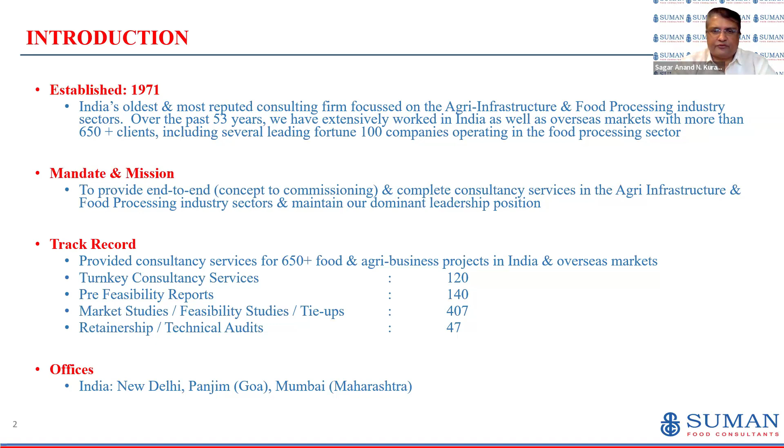To take the topic forward today, when it comes to designing and looking at a food processing plant, there are two major factors that come into play. One is the external factors. These are primarily those in which, while planning a plant and project, we do not have much control over, and therefore those are the factors we have to account for when undertaking planning and designing of the food processing plant.

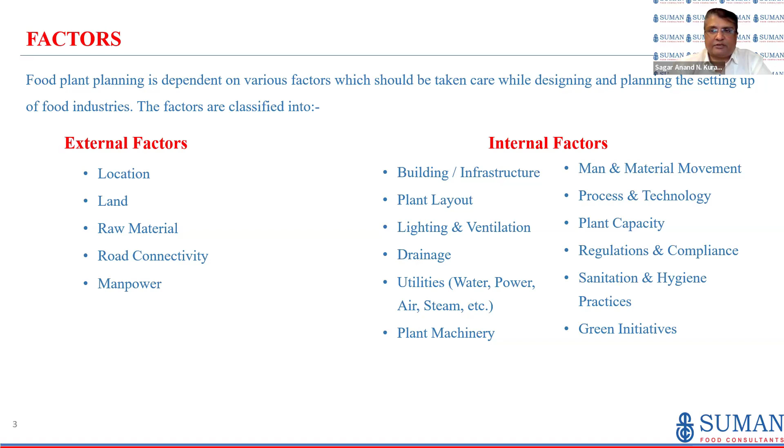The internal factors are ones on which we have control, but have to look into in detail in order to ensure that the factory is planned, installed, and commissioned in accordance with those expectations. My topic today is going to talk on each and every one of those factors, so there is a deep understanding of what needs to be looked at when putting a food processing plant in place for our clients.

So let's talk from an external factor point of view. When it comes to external factors, location plays a key aspect in planning of a food processing plant. Now why location? Primarily because of the availability of raw material.

If you have to understand, in terms of food industry, we are a big country where there's a lot of diversity in terms of the horticulture profile. Typically, food industry is put in an area where there is good availability of key raw materials within about 100 to 150 kilometer range of the food processing plant. So that becomes a key factor in terms of planning a plant. The location, as I said, has an impact with regard to raw material availability.

Another factor of location we have to look at is from a point of view of climatic conditions. If you are in a heavy rain zone area, the plant has to be designed differently. If you are in a very dry area, or a hot or humid condition, there are different aspects of plants that have to be looked at.

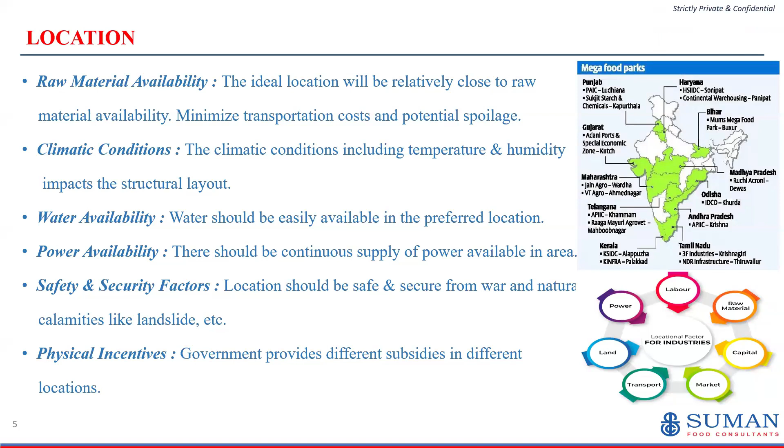As far as power is concerned, power is another factor. You have to keep in mind that power is a state regulated issue. So the cost of power in one state is going to be different from the cost of power in another state. And therefore, entrepreneurs make a call on the location of a plant based upon power availability also from this point of view.

I'll give you an example. Uttarakhand is one of the states which has a very low unit cost of power as compared to, say, Madhya Pradesh or Maharashtra. So if I'm looking to set up a very power-heavy kind of plant, and my raw material availability is there in that particular region, and it is there also in Maharashtra, I may look to set it up in Uttarakhand versus Maharashtra because of the power factor associated with it, because in terms of running, it will be much cheaper.

Obviously, we do projects in India and abroad, and hence the safety and security aspect of a project also comes into play. I'll give you an example. Angola, where we have set up plants, or some African countries—let's take Angola as an example—was under a civil war till 2003. In 2003, Angola opened up, and as the country opened up, a lot of security and safety concerns got removed. And therefore, you had a lot of plants and projects that came up in that particular country.

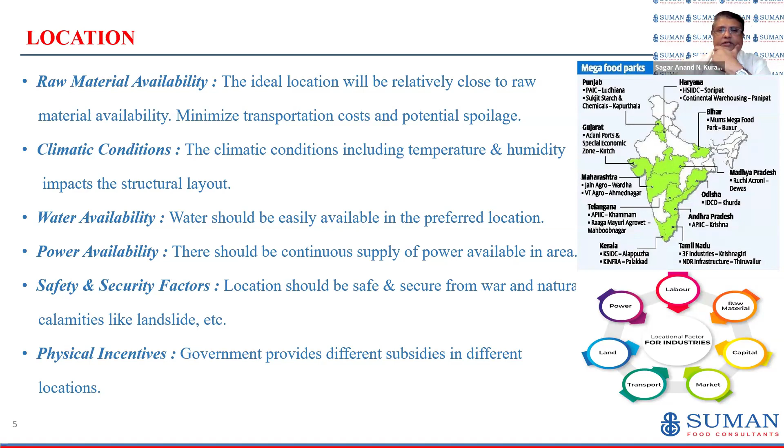Both state governments and the central government give incentives in terms of capital subsidy as well as running subsidies for setting up a food processing plant. This subsidy differs across states - for example, Uttarakhand or Andhra Pradesh may give around 5 crores, while a state like Punjab may give only 50 lakhs. So if the state subsidy is less, the entrepreneur may look to set up a plant based upon central government subsidy. So location is one of the key factors to be looked at from a food processing plant point of view.

Let's look at it from a point of view of land, because land is a key factor in what kind of infrastructure can come up on a particular plot. When planning and setting up a food processing plant, soil quality is important, because the weight of the entire plant and the foundations depend upon the quality of the soil. Initially, before the structure is put up and we just have the land, we do soil quality testing through drilling holes in different locations of the plot.

Then importantly, we also have to look at the topography of the plant site. For example, if we are designing a plant in Sikkim or a northeastern state like Assam, which will be much more hilly, versus in plain land like Uttar Pradesh or Madhya Pradesh, we have to account for the topography factor. Sometimes land may look flat, but there may be certain contours one has to account for. So that is also important.

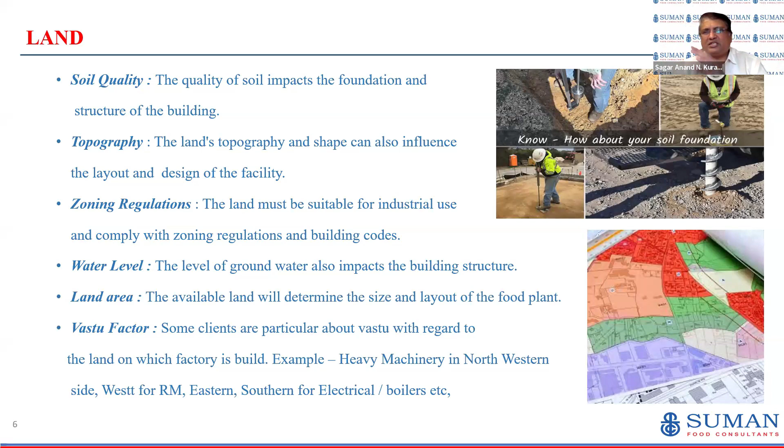So those are factors we have to look at. I'll give you some examples in terms of contour that I talked about. Contour mapping is typically done by a third party, but importantly, it gives us an indication of how high within a plot different surfaces are from a sea level point of view, and that aspect is considered while planning.

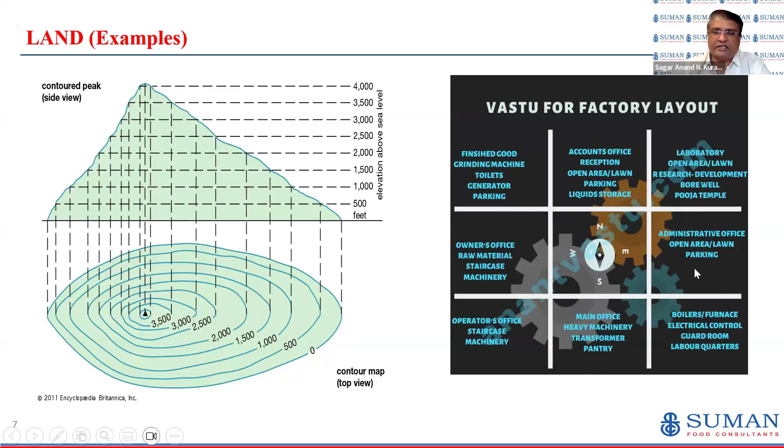When we are looking at Vastu factors, this is a perspective with regard to north, east, west, and south. Typically certain areas are expected in the west side, certain areas are expected in the east side. Not every entrepreneur or company typically looks at it, but there are sometimes expectations which have to be planned in accordance with the setting up of the plant.

So let's talk about it from the point of view of raw material, which is primarily an aspect that needs to be looked at from a point of view of quantum expectations. Which means it's not about availability of the raw material, but also about the quality of raw material and the quantum of raw material available.

I'll give you an example. Let's assume you want to set up an onion garlic dehydration plant in and around the National Capital Region of Delhi, or let's say parts of Maharashtra. I can assure you, whatever capacity of plant you decide upon, that project is going to fail. The reason that project is going to fail is because of the quality of the raw material available.

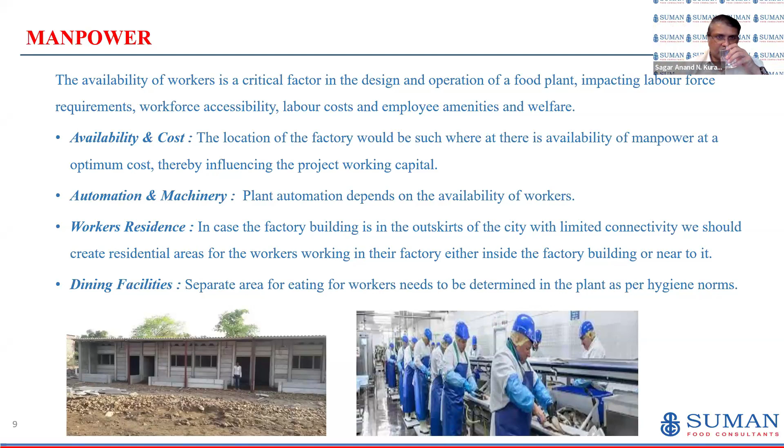Let's look at another external factor, which typically is not in our hands, that is with regard to road connectivity. Keep in mind that transport cost plays a very important role in terms of the success of that particular plant.

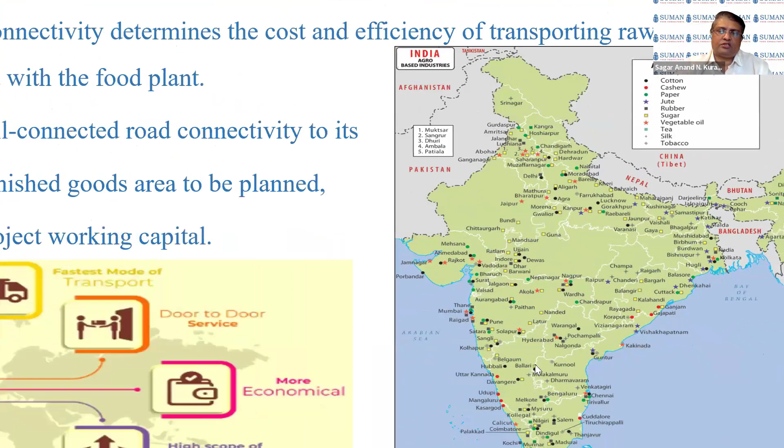I just wanted to share this industrial location infrastructure. If you guys can see, these are agro-based industries across different parts of India. Now you will typically find gap areas here - let's assume between Varanasi in UP to Calcutta, or Varanasi to Cuttack, or Varanasi to Indore.

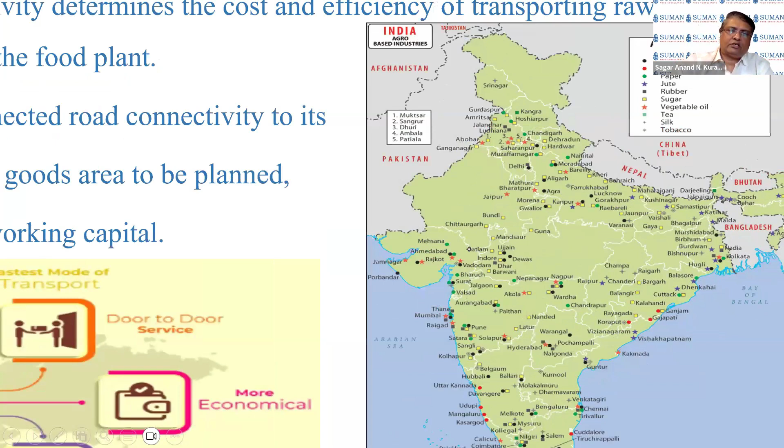The purpose of sharing that perspective is to reflect on the fact that typically it has been seen that if the distance between two major cities is more than 400 odd kilometers, the industrial activities in between the two places go down. If the road is not well connected, especially if it is 400 kilometers or beyond, the industrial zones get reduced in between that particular area.

Thankfully, over the last 8-10 years, we have seen good infrastructure getting built up, and the connectivity, at least between the two major cities, has improved. What we now need to also focus on is probably more cities coming up in India that take care of the population aspect and the boom associated in our country. But that's a totally separate topic, which requires a totally different discussion.

So connectivity is important also from a point of view of access to market. Keep in mind that in case there are certain products that require export, sometimes a client prefers the location of the plant to be closer to the ports.

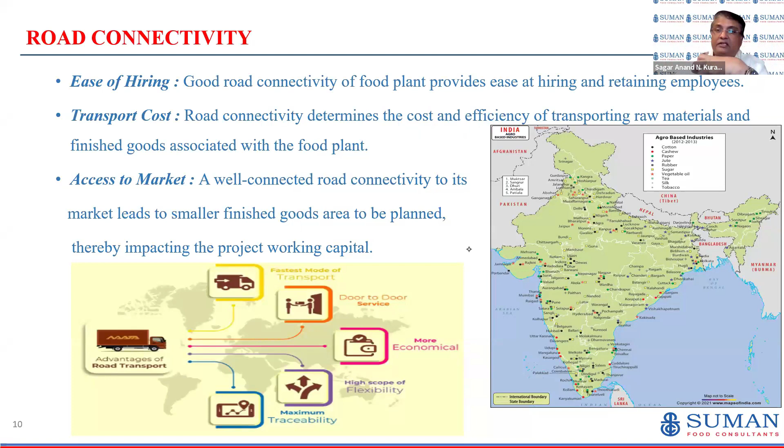So they may have to charge you double the cost of going from their location to your plant, and from your plant to whatever destination they want to deliver it. Those are also sometimes the factors that have to be looked at when we look at the plant aspect. So those were factors that are not actually in our hands when looking at it from a point of view of the plant, but they have to be looked at - whether it is road connectivity, manpower, raw material, land expectations, location expectations, etc.

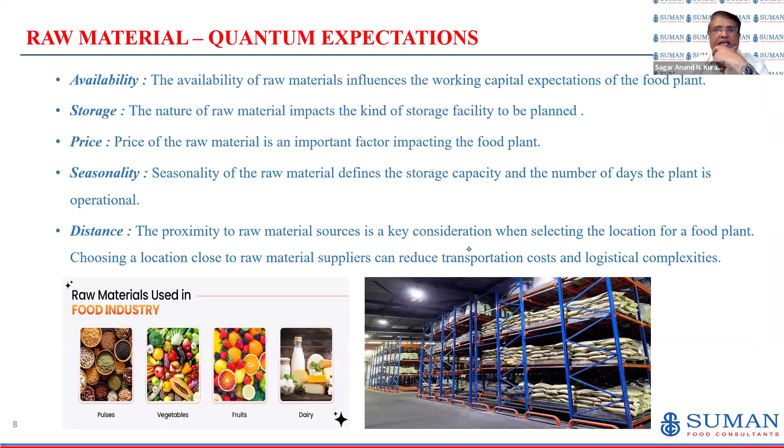Having said that, let's look at some of the internal factors that play a critical role in terms of planning and designing of the food processing plant.

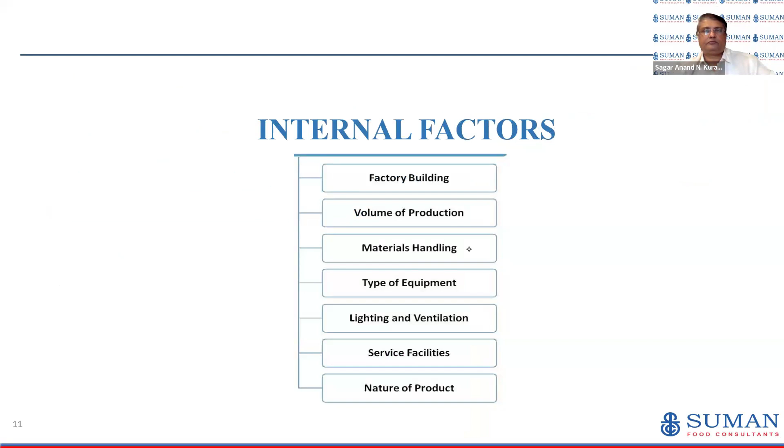So when we are looking to set up a building and an infrastructure, depending upon what kind of food product we need, or depending upon client's cost expectations, we have to plan on the structure.

Now, that structure of a plant can be a civil structure, which is more from a point of view of bricks and cement, pure bricks and cement kind of a structure, to a pre-engineered building. So there are companies that supply pre-engineered material also. If you have seen plants where there are metallic sheets, they are typically built over and above a civil structure. Now, keep in mind the cost factor.

So typically it has been observed by us that the cost associated with the pre-engineered building is less as compared to a civil structure. But there is sometimes need for putting a civil structure in place. And sometimes if you have an alternative where the cost can be brought down, we look to put a pre-engineered building associated with it.

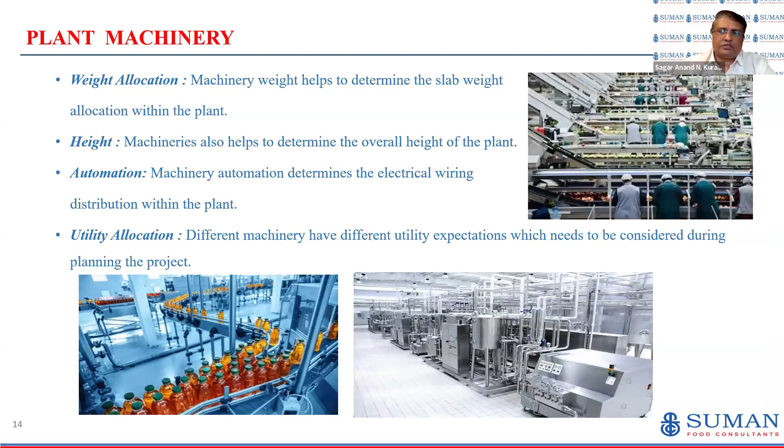So let's talk from the point of view of plant layout. Keep in mind, if you see, let me go into this slide and try to expand it so you guys can see it. Let's take this slide that is there.

When we are looking to put a plant layout in place, it is very important that there is a uniform flow of material movement. A food plant cannot have areas where material is coming back and forth. Once material has left the raw material section, it cannot come back into the raw material area. So it becomes very important to plan the layout such that material movement is uniflow and not impeding different sections of the plant. This also ensures efficient plant operations and efficient space utilization within the food processing plant.

Strategically, equipment is placed such that once a raw material is processed and goes into finished goods, the material cannot come back into the process section or any other section—from there it is to be dispatched. Within the process area, the positioning of your spare part room, packaging material room, and lab has to be placed so there are checks and balances and easy material flow with regard to the expectations of different sections as planned within a food plant.

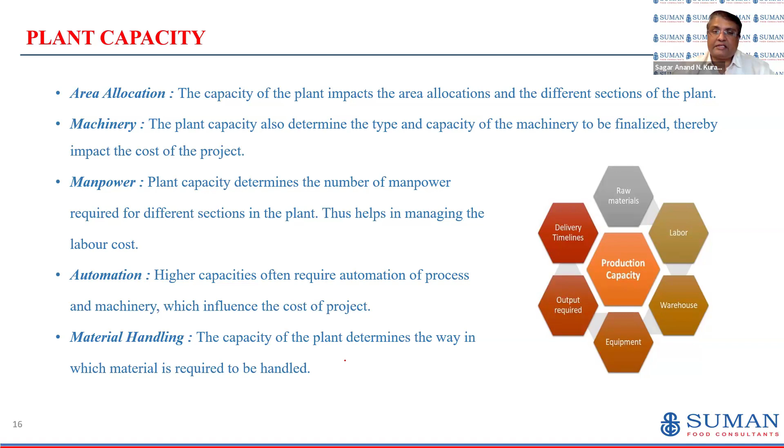For example, if I'm putting a continuous plant for a ready-to-eat product, let's say I'm making biryani at 400 or 500 kgs an hour in terms of production. But to make it shelf-life stable, I have to have a retort. Now, retort is a batch process, not a continuous process. So while I am doing retort, I will have a continuous flow of raw material, product coming in as packed into my retort section, and therefore my retort section has to be planned in such a way that it also has a continuous operation going in, and I don't have product lying around. Plant capacity therefore becomes critical from a point of view of planning the food processing plant.

Now, some things that typically people ignore relate to lighting and ventilation when it comes to a food processing plant. Keep in mind that there are regulatory implications with regard to what kind of lux factors are required in a food processing plant. You just cannot put a light and say that it's bright enough. That bright enough is determined by the lux factor, and there's measuring equipment that gives you that lux factor.

Typically when a food processing plant is set up, the raw material, process, and finished goods areas require a bright range. The lux factor typically varies from 400 to 600, and there should be no gap areas. It should be well lit across all areas and all corners of the plant, not just in a certain section.

Same thing applies to ventilation. When we plan, we are all facing heat at this time of year. Imagine temperatures reaching 50 degrees, and conditions in a plant where cooking is happening, steam is there, heat is being generated, and the workers therefore have to deal not only with the outside heat but also the heat within the plant. Those working conditions become unbearable and it's not possible for any worker to operate efficiently.

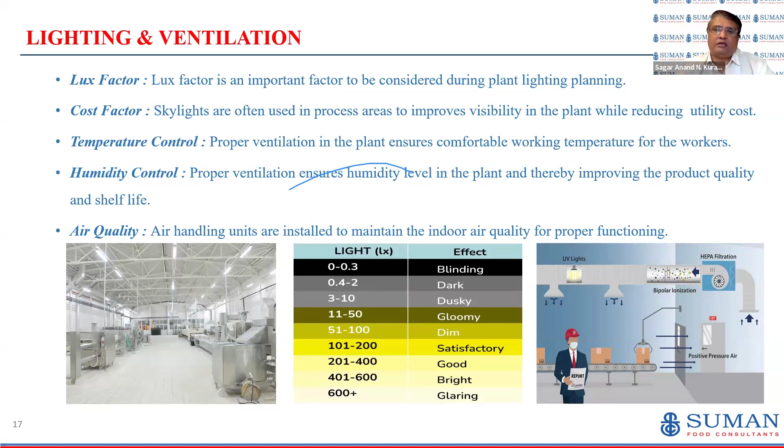So lighting and ventilation are very, very important. One factor I like to share is that there are times we can look to save cost in terms of lighting. Sometimes when we plan a plant, we put skylights in such a way that a minimum amount of lights has to be used at least during the daytime, and that also helps in terms of saving. This is typically true for a pre-engineered building versus an engineered building.

I know we are falling short of time, but I want to share a few slides that are also important from a point of view of planning a plant.

When we are looking to plan a plant, it's important to ensure there is a proper drainage system, both within the process area and outside the plant. Within the process area, suppose the plant has wet operations in place - it's a beverage plant, or requires regular cleaning. Let's assume the plant involves processing high protein product, like meat products or milk products. We have to ensure there's proper cleaning, and proper cleaning of the floors involves proper drainage being put into place. In that drainage, it's very important to ensure there is no rust, no collection of dirt, not only on top but also within the drain.

When you're planning it, it becomes very important to ensure the drains are also easily maintainable. It's not just about putting the drain, but within the plant we try to ensure the drains are maintainable. Therefore, the covers on top should be removable, and proper maintenance can take place with regard to the drains. These are important sanitary and hygienic conditions that require to be put up.

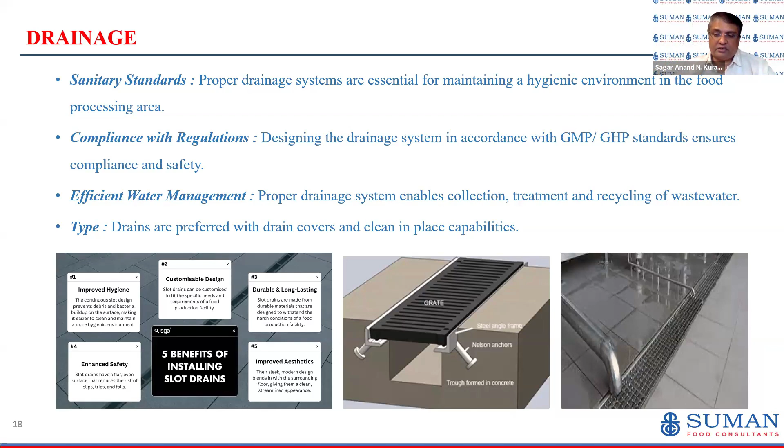We talked from a point of view of machinery, and we also talked briefly that machineries have an impact on utilities. Those utilities have to be looked at within a food plant, because my machinery requires power, and I cannot look to put power line expectations in a concealed way like we do in a residential area or building. Those have to be planned in such a way that they are easily maintainable. So in a food plant, when we are looking to put different pipings or structures, we need to put it in such a way that in case of any issues, they are easily maintainable. That's an important expectation.

So the electrical wiring, electrical cabling typically happens under open channel conditions. The channels typically run through different sections of the plant, and the power connectivity is typically given to those plant and machineries.

Also, water is a very important factor to ensure. The kind of water treatment plant, the WTP that comes in the plant, depends upon the water quality that is available. That can be municipal water, or groundwater. But keep in mind that we cannot take the water, no matter what the assurance from anybody, directly into the plant without treating it. That can be treated with a simple softener, or with an RO system, depending upon the quality of water that is available.

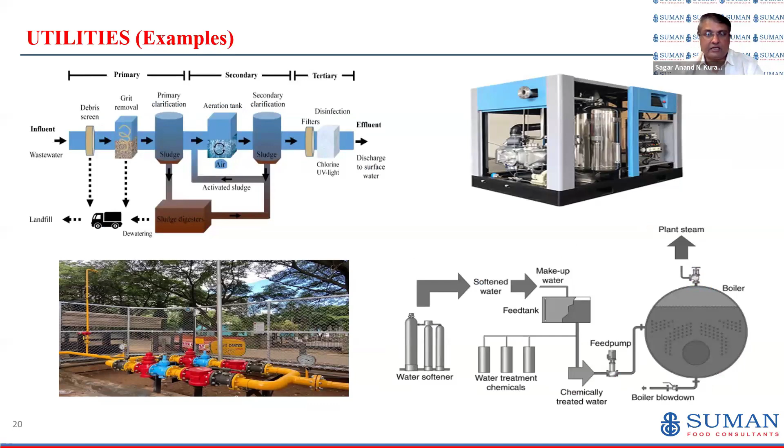Even in terms of wastewater treatment, there are two technologies that typically come into play: one is MBR, another is MBBR. That depends upon the kind of effluent typically there in the food plants associated. So just an example of various utility factors that are important to look at from a point of view of designing and putting a food plant in place.

Let's look at it also from a man and material movement perspective associated with the plant. This is an example we are sharing with you of workers' access. When looking at setting up a plant, it's important that nobody should be able to enter the plant from any given particular area. The access to within the process area is planned in such a way that workers are coming in and going out in an orderly way, and not from anywhere there.

Of course, the plant requires fire escapes to be planned and everything. But in terms of access to the plant, for lady workers it typically is different, for gents workers it's typically different, and they have to be planned accordingly. Even management sometimes may not take their visitors or clients from general areas; they may want to access it from different areas, but their access has to be planned in a way which is hygienic and does not impact those aspects. So you need to ensure a proper dress code going into a process area, and ensure proper access and hygiene parameters are followed in that area.

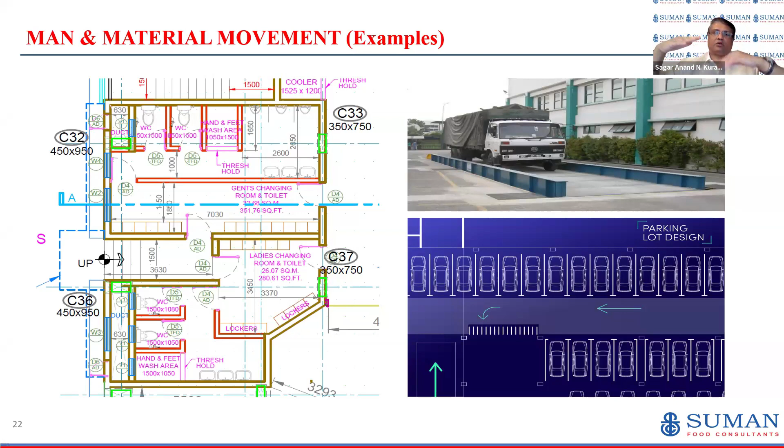Regulations and compliances are important from a point of view of planning a plant. For example, if I have effluents in my plant, and most food plants do have effluents even if just from wet cleaning of floors, those effluents cannot simply be drained out. You have to treat them so that regulatory parameters are met before they are dispatched.

Typically what we do today is what we call zero liquid discharge. This means that fresh water coming into the plant is used as much as possible within the plant, and any wastage from that water is treated through effluent treatment so that we can reuse the water again, typically ensuring that treated effluent is reused in toilets or non-contact parts of the food processing plant.

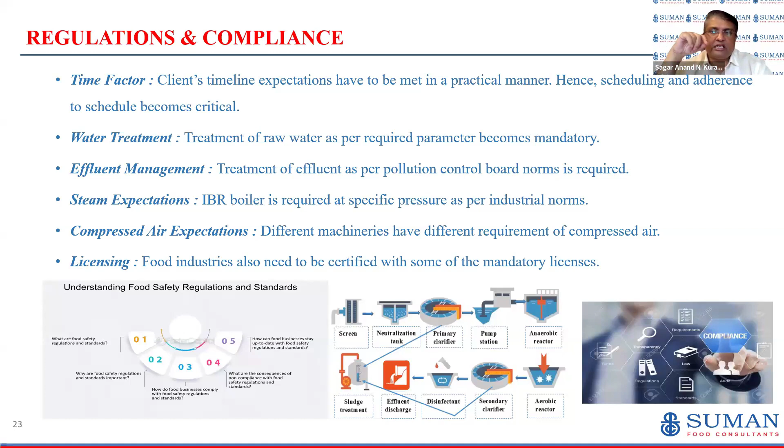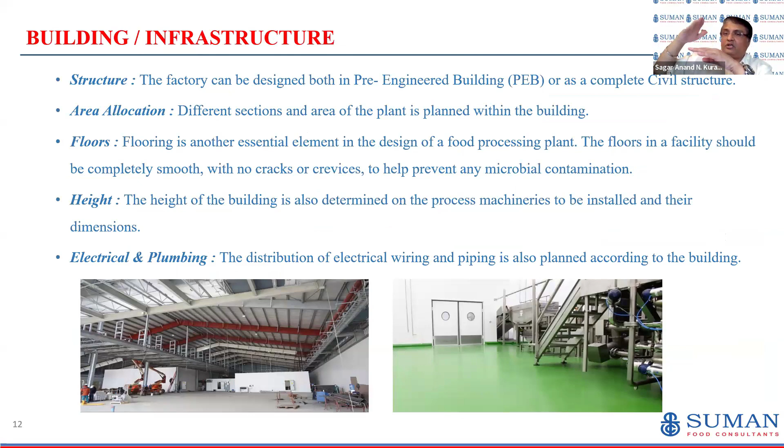I'll give a small example from the previous plant slide I showed. If you see the green flooring, in these corners you cannot have sharp 90-degree corners. There have to be covings so that no dust or dirt collection takes place in the plant. Small, minute factors, but they play an important role in planning that particular plant.

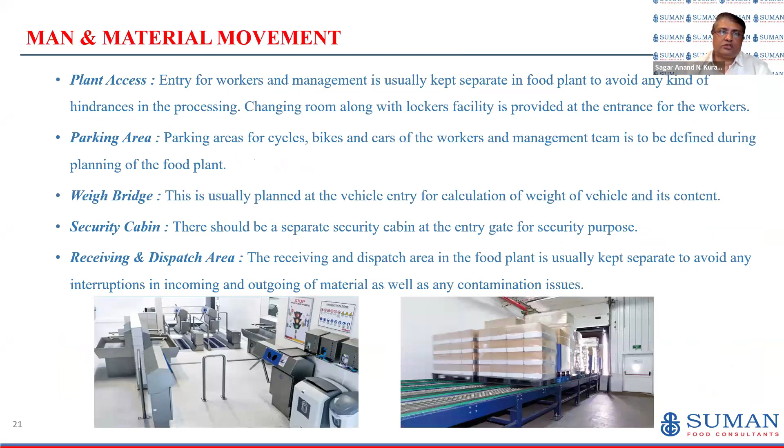When it comes to planning, hygiene and sanitation are key factors. I've seen entrepreneurs sometimes not give focus to laboratory equipment. Lab equipment becomes very important and critical because it helps define the critical control points of the entire plant. The expected output quality of your finished product is only as good as the inputs taken into account and the process followed. How do we know the process is followed and the input quality is good? By testing through different parameters using lab equipment for quality standards. So critical points are typically defined to ensure the quality expectations of that plant.

Keep in mind that when we are planning a plant, pest management isn't just about rodents, it's also about fly traps or flies coming into the plant. So sometimes in dockyards, when we are putting a plant in place, we put air curtains around the entry or exit of different areas. That is primarily put so that when doors are open, when the plant is open, you do not have flies or insects coming in from outside, and they work in an automated connected way.

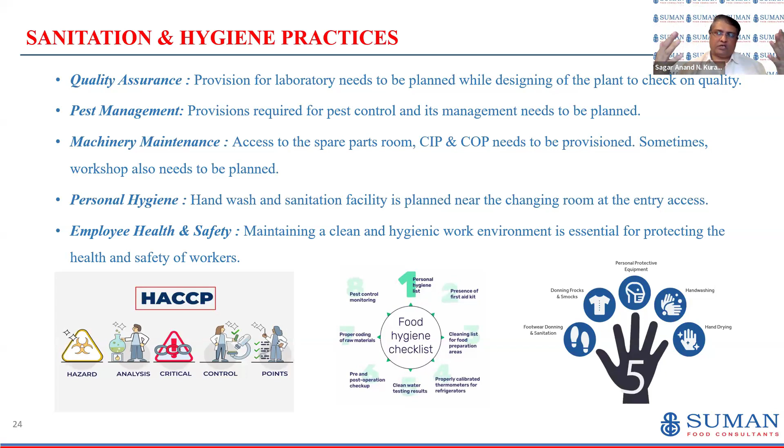This is not only to ensure better quality assurance with regard to the product and process, but also to ensure the health and safety of workers within the plant. So you need designated areas that reflect the process flow and the rules to be followed, so it's not just a one-time training, but easy for workers to read on a regular basis and keep in mind.

My last slide is going to be more from a point of view of green initiatives. These days there is a lot of awareness with regard to greening initiatives. We have done a project for the National Meat and Poultry Processing Board also with regard to how to bring cost factors down in a food plant through green initiatives. Even today, when subsidy is being allocated, the government may be looking at it from a point of view of what green initiatives have been taken within the food plant.

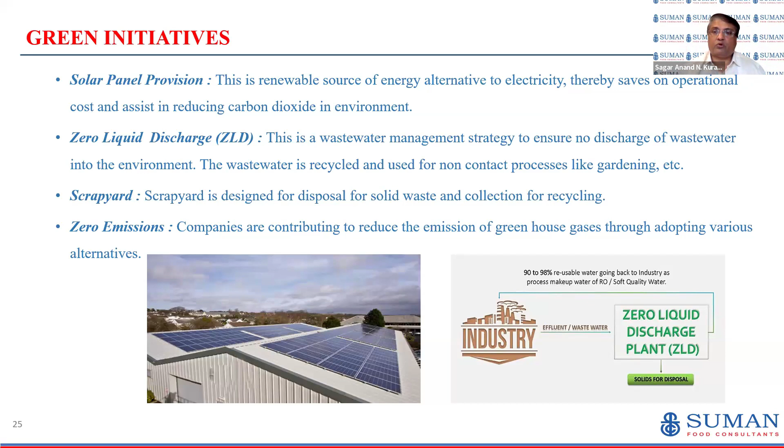More importantly, all these plants should lead to zero emission initiatives, which are also helpful when you are looking at environmental certifications. So whether your plant has zero emissions or not, as long as you have taken certain provisions and tried to incorporate those as green initiatives, they are looked at positively tomorrow for any certifications you may be looking to put in place.